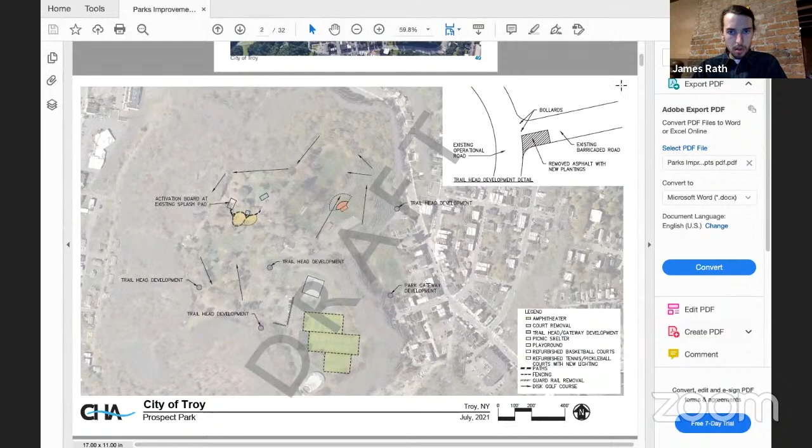So for Prospect Park, obviously one of our larger parks, you can see the arrows here point out our disc golf course, which is fairly new. The yellow down here is the tennis courts. You all can't see my cursor, correct? Yeah, we can see your cursor moving around. Oh great, and the pool down here on the bottom, just to orient ourselves.

So for Prospect, what we really wanted to focus on was the playground equipment. We identified a need for an amphitheater or a small event space. We wanted to address the vehicle traffic and how vehicles have been going onto the lawns and damaging the park space in the past. And with that, we wanted to make sure the circulation worked, not only for people who are walking or driving in, but also our maintenance vehicles, so that those folks can get around the park easily.

And then we talked a little bit about the needs of the tennis courts and other sports facilities like that. So you can see the legend on the bottom right that points out a bit more of where things are. And up here on the top right, this is a standard detail of how we would address some of those vehicle routes.

So we would remove some of the excess asphalt. That could be repurposed for anything as simple as just lawn, or you could plant a tree there or do something else with that space. And then we would have some bollards that would likely collapse down so that maintenance vehicles could get by.

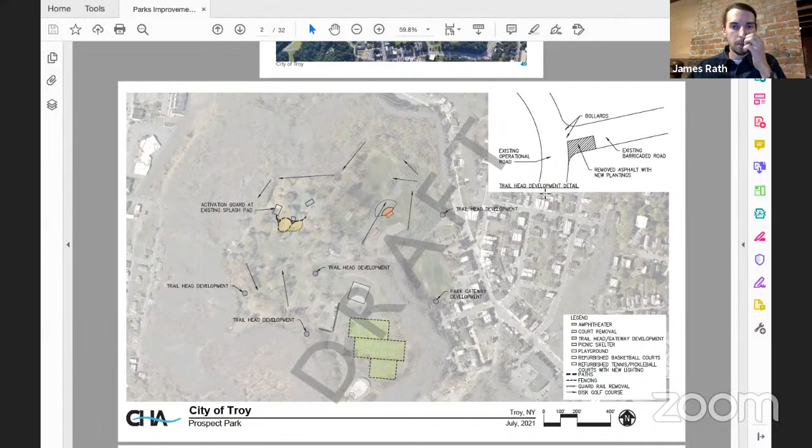So the little purple dots you see are places where we would have this sort of trailhead treatment. The bollards would be sprinkled around about every 6 feet or so, so that you wouldn't be able to drive in there. And the playground area right here would stay in the same location, but we've changed that layout a bit. This orange circle is the amphitheater.

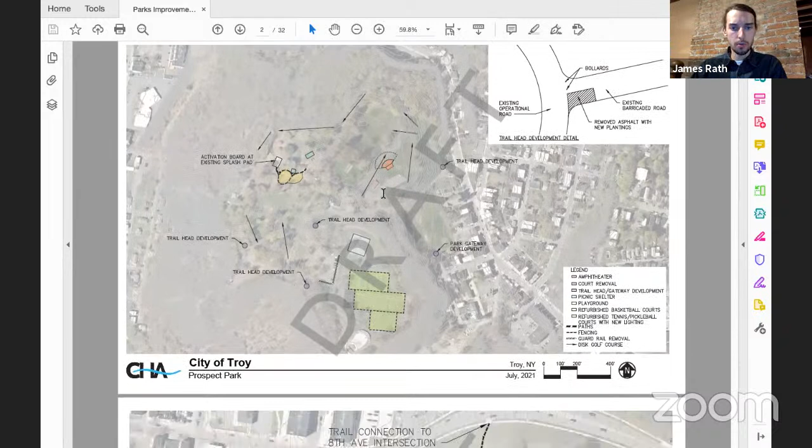Sorry for jumping around a little bit there. I'm just going to keep moving through here. The other main thing we wanted to address with Prospect Park was a new access point closer to downtown.

We know that most of our downtown is the most densely populated area, and we don't really have a true pastoral or open space where people can play or go for a run. We have Riverfront Park, which is very different, and some smaller areas like Sage and Barker Park. But for folks to get into Prospect Park now, they have to walk all the way up around on Congress and Ferry and go around. It's quite a distance, and the grade is challenging.

So we wanted to reutilize some of the old roads that were there back in the day and create a walking path. This would spit you out right over just east of 8th. There's also this existing trail now, which is a little overgrown. Some folks are afraid to go back there. We've had people who have lived in the woods or camped out there.

So the more we encourage positive, active uses, with people going there more often, the more we can discourage people from using these spaces in improper ways. And that goes throughout the park system, not just this park at Prospect.

So we've highlighted the trail on the western side here that would connect down to Haverman's, and goes out over here on Ferry. That would really just be cleaning that up, making it look more official, doing some trailhead signs, stuff like that. And then the trail on the right of your screen that meanders through the woods would need some minor grading, maybe addressing some flooding areas, so you'd have to build some raised walkways, and then just gravel throughout most of it.

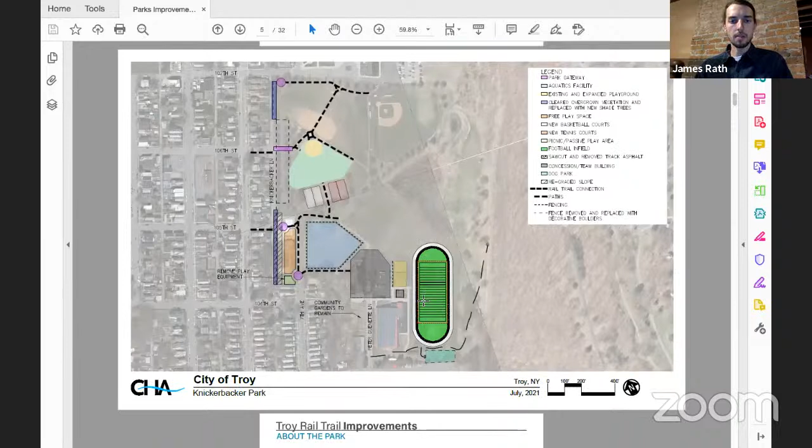Down here on the bottom we have the existing track. One of the main things with Knickerbocker Park was we wanted to create more places for people to play organized sports. We heard a lot from the community, especially up in Lansingburgh, that they needed a place to play youth sports like Pop Warner football, basketball, and things like that. They didn't really have a concrete home, and have kind of been bounced around these different leagues. The city understands the value these leagues bring to our youth.

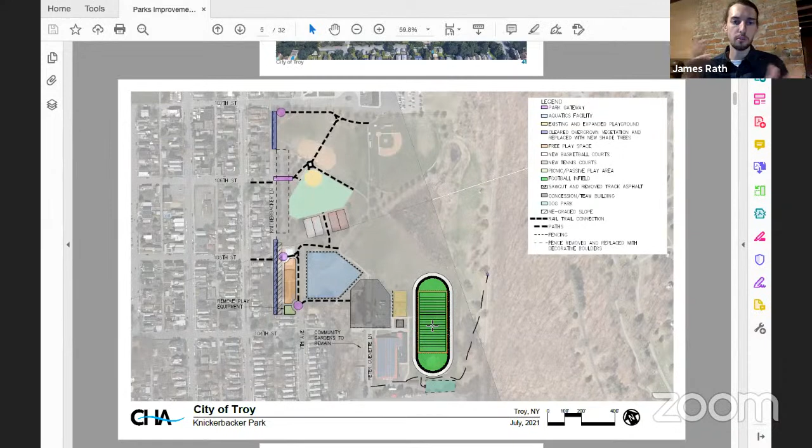Instead of squeezing them into smaller spaces where that use ends up consuming an entire small park, we decided to double down on the sports complex idea that already exists in the Knick. We found that within the existing track you can almost fit a football field. We also found that the existing track is wider than any official track really needs to be.

Oh no, what's just happened to my Adobe? Bear with me one second. My Adobe just quit on me. Sorry folks, let's see if I can just open it again. Oh, all right, that was weird, it didn't quit.

We found that the track is actually wider than any official track needs to be, wider than a high school track would need to be. We're not actually using it for standard track meets or anything like that. So what we highlighted as an opportunity to fit that field in is we would trim out some of the inner edge of the track, allowing us to fit in a full-size football field and give the Pop Warner Football League a home. The field could also be used for lacrosse, soccer, or other things like that.

In this yellow square, if you look at the legend, you'll see a new playground. That playground, from what I understand, has actually already been installed. This black polygon here is a new expanded parking area. We understand that bringing folks in from other communities to play organized sports, along with the anticipated installation of a new pool, means we might have higher traffic in the park, so we'd like to accommodate that with a new parking area that would circulate people a little better.

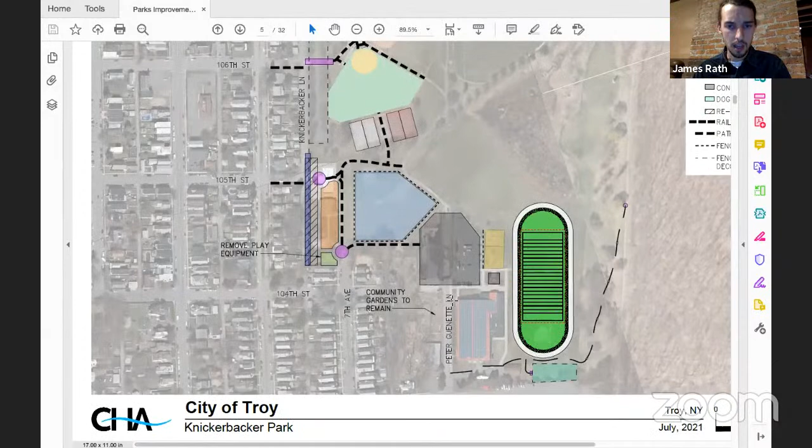So if you're driving to the park, if you're staying for a while and need to drive there, you would take 103rd and go up into the lot as you would today. The access would be maintained on 103rd down below, just off the map, and you'd go up as normal.

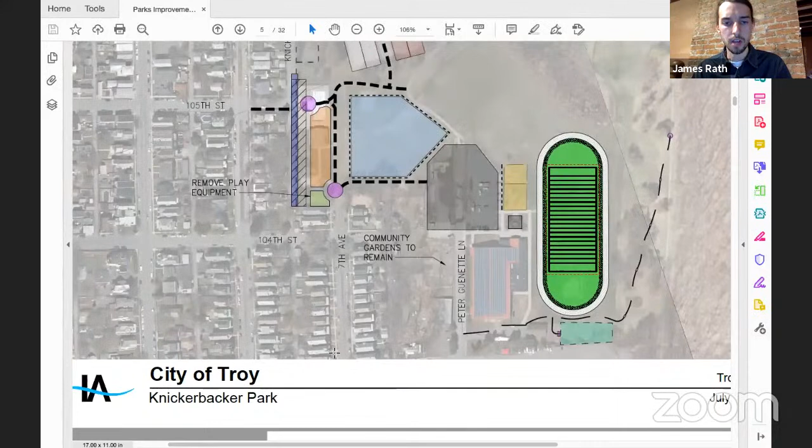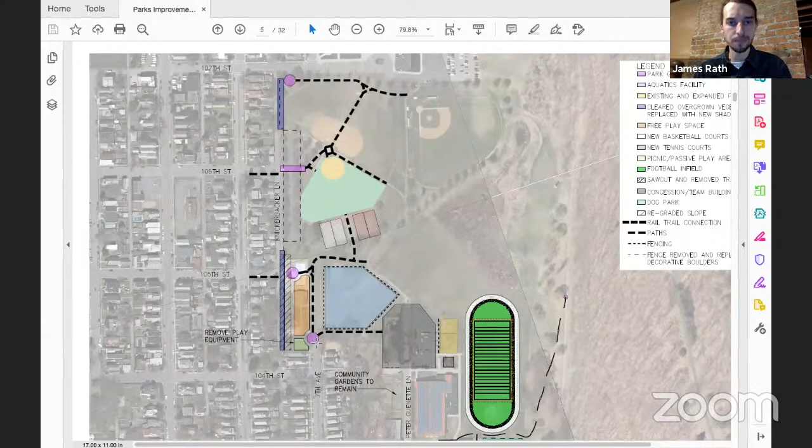But we did want to create these pedestrian connections that you'll see in purple. So you'd be able to walk in from 7th Ave, where it dead ends. There would be new, smaller scale fencing - likely 4-foot black chain link fencing, much more welcoming than the 10 or 12 foot or 16 foot or whatever is there now at 7th Ave, which is very oppressive or deterring, and make it feel like it is actually a part of the community.

We want to do similar things at 105th and 106th and at 107th. Right now at 107th, you have to walk through the school's property to get to this section here. We want to make it feel, again, like it's more part of the community and get people in and out of the park so that they can use it and enjoy it.

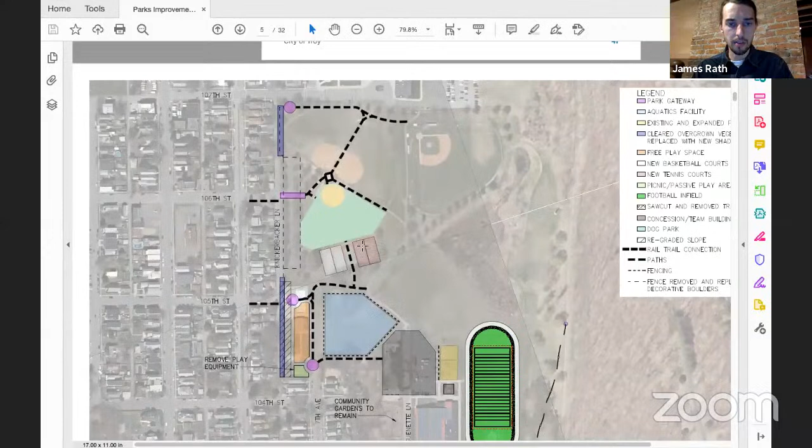We did highlight the existing tennis courts here that are in a little bit of disrepair. We would like to make 2 of them basketball courts and 2 of them tennis courts, because one of the basketball courts would be displaced from the pool's location as well. Okay, that's a lot for the Knick, but I do think I covered all of it, so I'm going to move on.

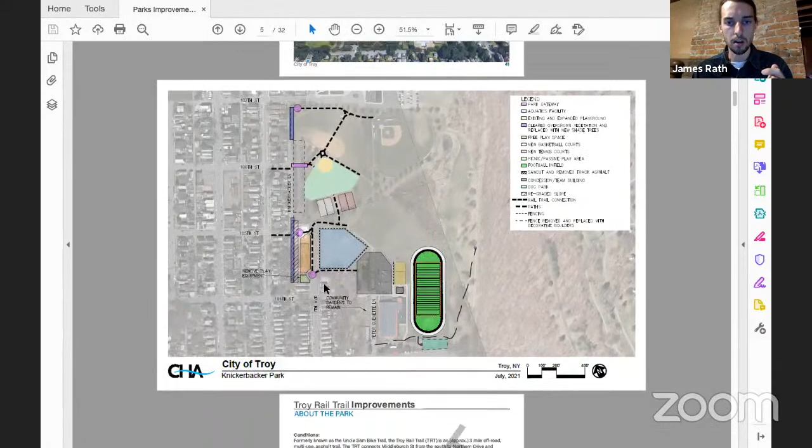And then right next door, I already mentioned some of the ideas around the Troy Rail Trail. You can see 2 photos here, just to again kind of be thinking of what that space is and how it functions.

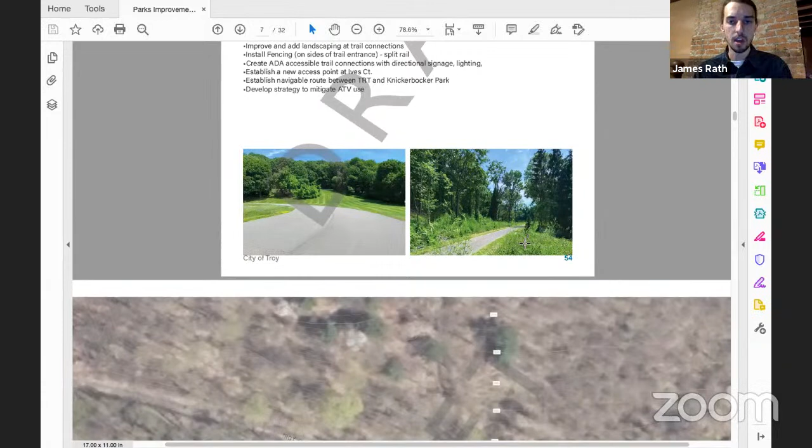Again, we're calling the Troy Rail Trail what was called the Uncle Sam Bike Trail. We do plan on renaming it the Troy Rail Trail to pay homage to its history as a railroad - I think it was the Boston and Delaware Railroad off the top of my head - but it is very loosely associated with Uncle Sam. Really the only thing I've been able to dig up is that his grave is nearby.

So we also have another trail called the Uncle Sam Downtown, which is a history walk that folks do. And we have had calls into the planning department with people confused by having 2 trails named Uncle Sam.

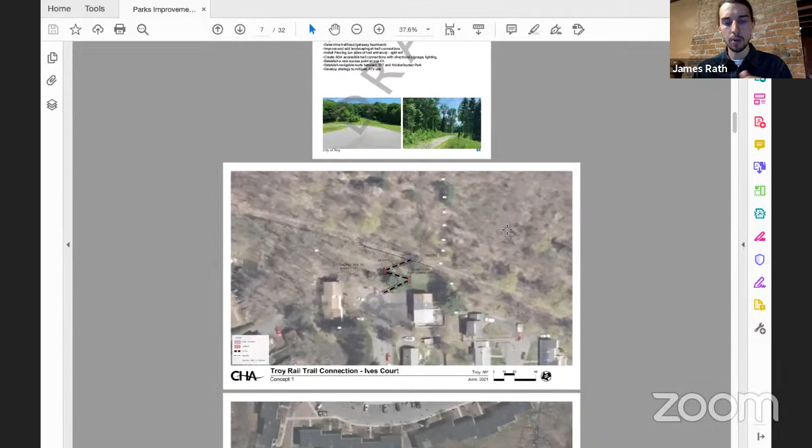So the idea is to change this to the Troy Rail Trail, so you'll see it labeled as such here. I only have 3 different access points on here. We'd like to add a couple concepts together so it looks the same at each entrance, including Ingalls, Gurley, Cemetery, and Northern at least.

Here you can see a new connection at Ives Court. We've been talking to the landowner here whose property has an awkward shape - two landowners on either side of the cul-de-sac have land that touches at the end of the street, which is very abnormal for Troy, usually that's continued right of way. They've had issues with folks going onto their property to access the trail, and they don't own much of the property along the trail over here. So we've been talking about a land swap or lot line adjustment, which seems mutually beneficial, and they've been on board so far - we're working on that as an opportunity.

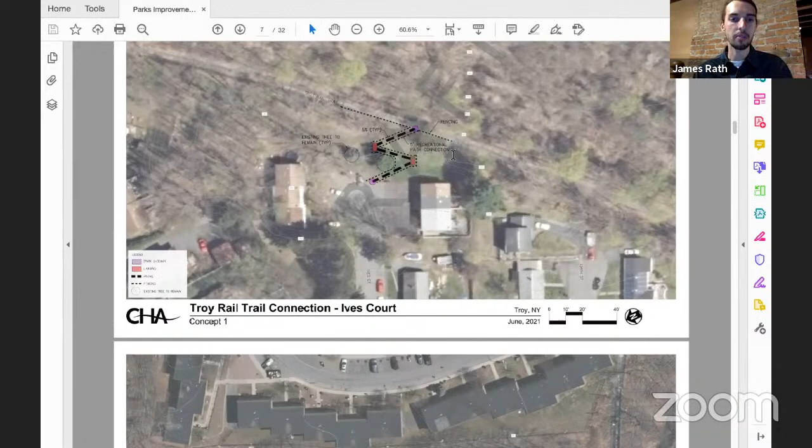So what you're looking at here is a switchback entrance at Ives Court. This would bring a legal, appropriate, inviting entrance to a whole new section of Lansingburgh. Right now, if you live in this community, you either have to trespass across someone's property, or walk all the way around on Northern Drive, where there's no sidewalk, no bike lane, no real safe way to get up there. So the trail loses a whole audience.

I'll show the next one as well, since they're quite similar. Here's Winnie Ave with Garden Court on the left and Glen Ave on the right. Over on Glen Ave, we're doing the same thing as on Ives Court - these are ADA compliant switchbacks. You go into one section and go back and forth to tackle that grade, making it much more accessible. Somebody in a wheelchair can use this facility - it's wide enough and the grade is appropriate.

The light dotted line, the smaller dotted line, is fencing as well. We'd like to include fencing all along this section to deter ATV use. A savvy dirt bike rider will be able to get through anything that somebody in a wheelchair or somebody pushing a stroller will be able to get through, so unfortunately we can't completely block them off, but this is meant to deter them from shooting through these spaces quickly, while also making it warm and inviting to other folks.

On the left over at Garden Court, since we have our ADA entrance on Glen, on Garden we're just proposing a maintenance entrance. There would be either bollards that you could knock down and put back up, or a utility gate, and we'd narrow it down with some striping to make it feel a little tighter. There would be a pedestrian opening there so you could walk through if that's more convenient for you at Garden, but it won't necessarily be ADA compliant.

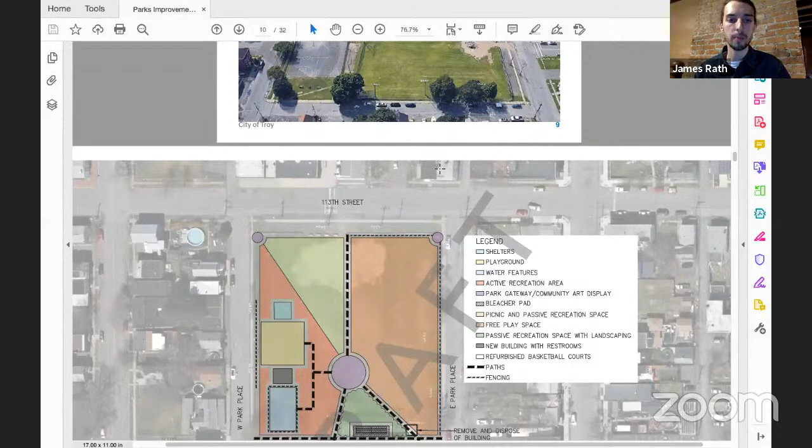We have two concepts for 112th Street Park. I know there will be different reasons folks might like certain concepts, and maybe things we missed in both. At the end it'd be great to get some feedback and hear which ones speak to folks more. They are fairly similar, so I'll briefly show concept one, and then go through concept two in a little more detail.

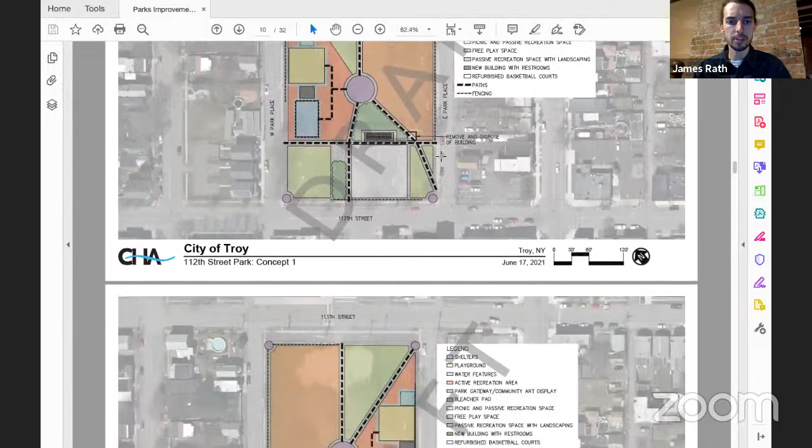Okay, so what you're seeing here, the existing basketball courts here on the south side. Here's 112th Street on the bottom and 113th Street on top. You can see the sidewalk that goes around the Boys and Girls Club.

Just to orient folks, what we're showing with the dotted lines are new pathways that would go through the park. Right now there's the existing old softball or baseball field, which isn't really in use anymore. Jim and I got to meet here and he told me a little bit about the space and how it functions, with stories about breaking windows with his home run hits.

We know that there has been some conflict with the baseball use and the neighbors there, so we know that baseball isn't necessarily the most feasible use here. We're kind of trying to encourage those uses over at the Knick.

So what we've created is a little bit more of a common space. The orange space on the left is just open free play, so kids can bring a soccer ball or football and play on their own. The green space would look very similar, but would likely function more in a pastoral or contemplative way. It would be a space you'd want to have a picnic, maybe do some grills there, stuff like that.

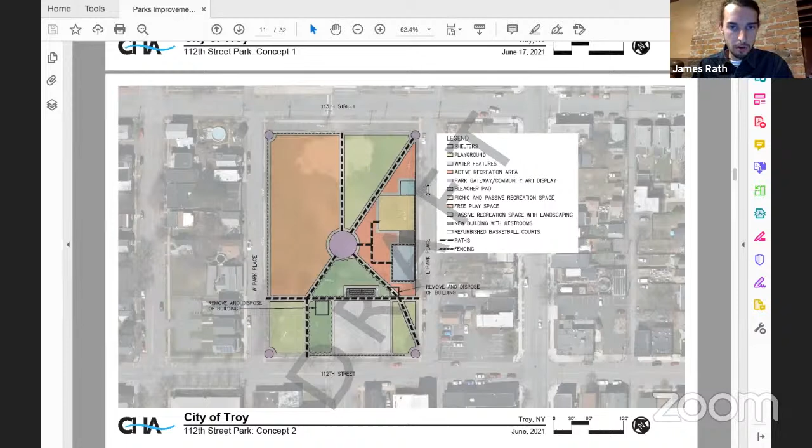This zone on the right along East Park Place is a bit more busy. We've highlighted the space for a splash pad, with a new building with restrooms required for the splash pad. We've got the yellow space as a playground, and the blue space is just a little pavilion.

We knew from speaking with the Boys and Girls Club that they wanted the playground closer to them, which is right now in this bottom left square. They have to walk a little bit further and they're not as comfortable doing that.

And it's really close to the basketball courts, where there's often people getting into an intense game of basketball, and it's not really the best place for a 3-year-old to be learning how to use the jungle gym at the same time. So we've separated those a little bit.

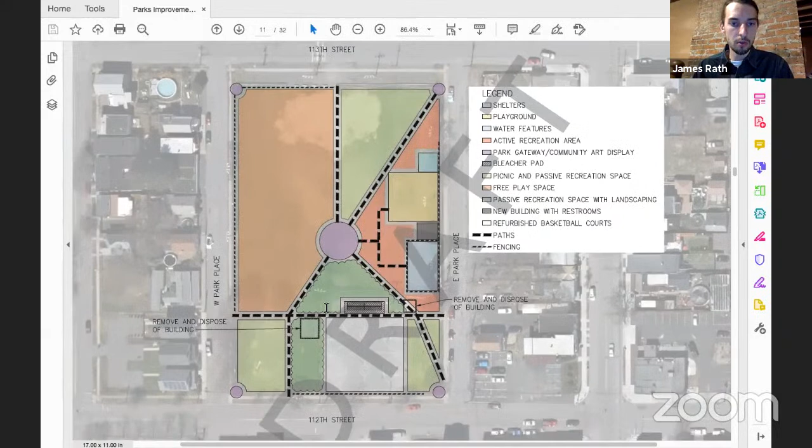We've also added some seating by the basketball court, so when they're having bigger games where parents want to come out, they have a place to sit and watch.

We've added this landscaping area to kind of buffer those spaces. These are small scale plants, maybe 2 or 3 feet tall, low maintenance, but you would still be able to see across the park. It would just not be a place that you'd necessarily want to walk right directly through.

The bottom right area, we know there have been some issues with folks loitering there, maybe bringing alcohol into the park, things like that. We want to clear that space up a little bit. There's some kind of beat up pine trees there right now, so we want to clear those out and create a warm, welcoming entranceway so you can walk through the space.

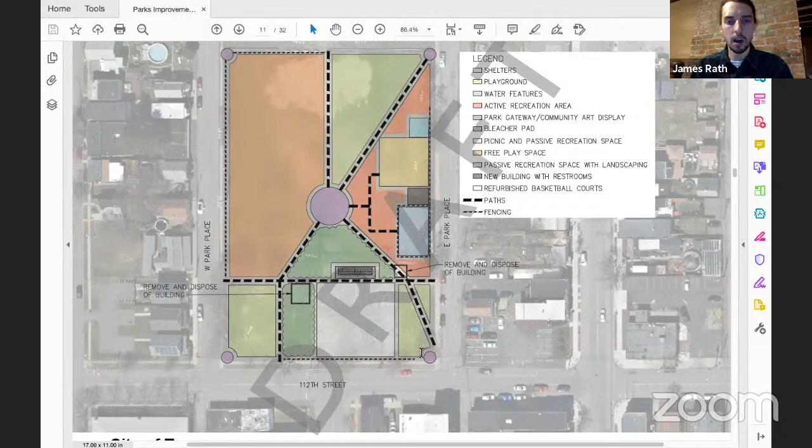One thing that I really like about these concepts is that it creates multiple uses for the park. So right now, if you live in the area and you want to go for a run, walk your dog, or take your kids out in the stroller, you probably aren't going to 112th Street Park. There's really nothing there for you, and no way to get through it.

This totally changes that. It creates a real destination for folks that want to spend a lot of time, but it also is just a route for people who are passing through. So if you want to take your dog on that walk, now you have a great new route to cut through. We have routes that go different ways.

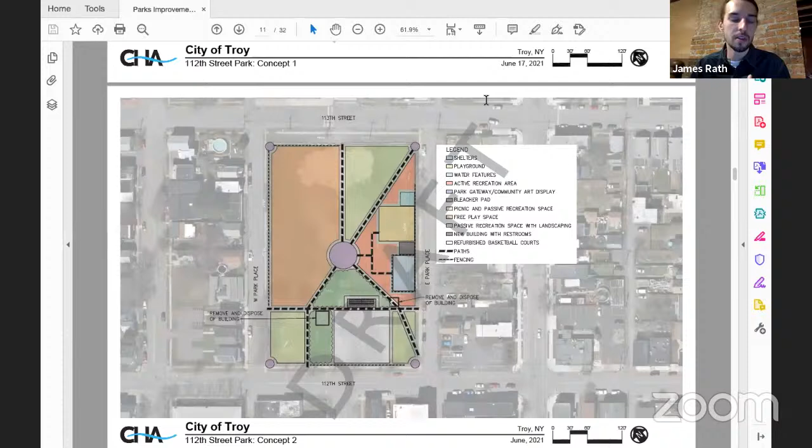I like the route that goes northeast because Snowman Ice Cream is right here, and we know a lot of folks are going there, so it plays well with that sort of thing. People who buy something there now have a new place to go sit and hang out.

Okay, if Bonnie's still on the call, I think, well, hopefully she'll be happy.

If you have a car, you can put your dog in the back and drive to a park in Colonie or Albany. We weren't necessarily filling a big void there. We wanted a space that people could walk to really easily. We know from hearing from folks like Bonnie that downtown there are tons of dogs and people can't really get to a place to let them off leash safely.

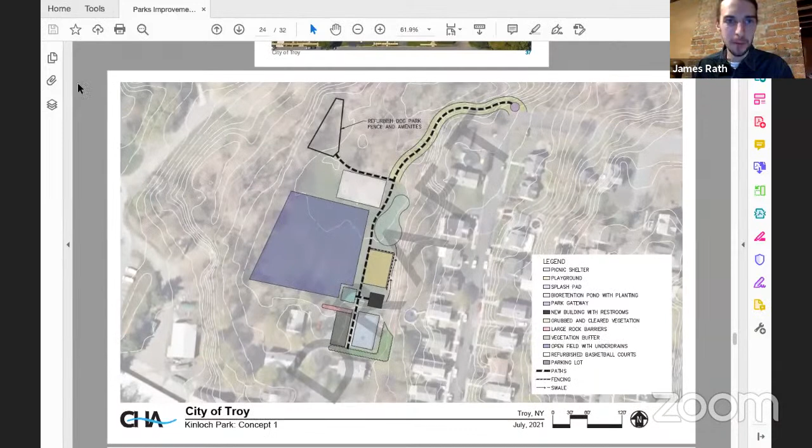Kinloch Park, up on the east side. I think the name of the street is Parmenter - I was calling it Parameter for a little bit, but I think it's Parmenter. Kinloch is actually over here, and Emma Willard is right over here on the top left. Again, we have 2 concepts, so showing concept 1 now, I'm going to go through concept 2.

There is, or was, a dog park there now - there's a fenced in area. The fence is a little damaged, and we've been there a handful of times and I haven't seen or heard of anybody using that dog park space, probably because of that state and the location. We could easily remove this fencing, but we've heard from some folks in the community that they would prefer for it to be refurbished and fixed up. So we've shown that here on the concept plan, but again, we don't necessarily need to put another dog park here if that's what the community didn't want.

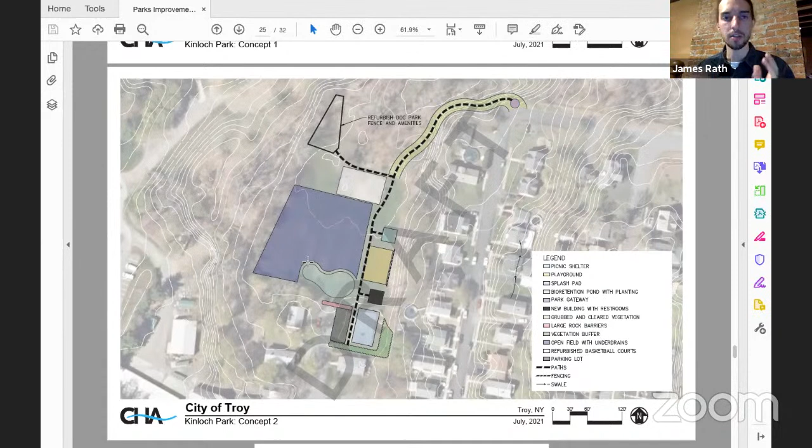This blue area is just a field, and right now we know that field area floods fairly consistently - even throughout the summer months, this field has drainage issues. So that's one thing we've really tried to focus on with our plan. We've talked about drainage strategies, and we've also talked about adding a bioretention area, shown here as this circular polygon, which would be a simple way to contribute to solving that issue.

We also want to create a real park entrance and gateway, not only at the bottom on Parmenter, but also up by Kinloch, where we have city-owned land. Similarly to some of the spaces in our other parks, we've heard of misuse in the backwoods area. And we also know that if you live over here in this area, it's harder to get into the park - you might not go as often. There's no way to do a loop or walk a route where you'd be bringing your kids or your dog through this park.

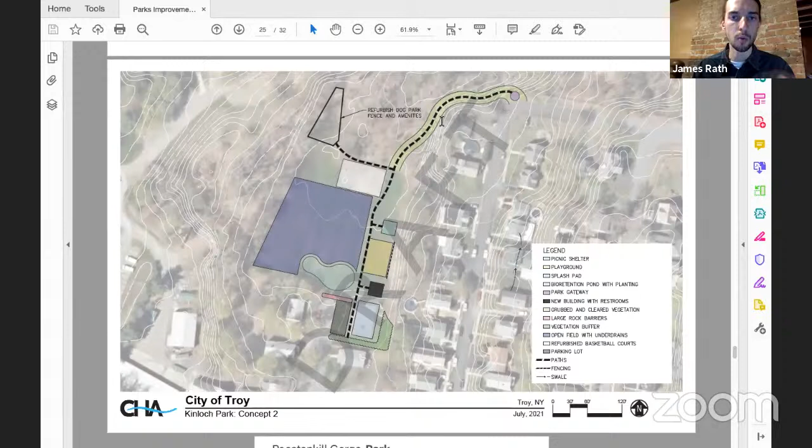So we wanted to add a wooded nature trail, another access point to the park in this corner. And then at the bottom, we really want to make it feel welcoming, like a gateway. Right now it's like a big piece of guardrail - we want to remove that. We want to add more decorative elements like nice looking bollards or maybe some boulders so that people still can't drive into the space, but we would put in a maintenance gate for our maintenance team to get in.

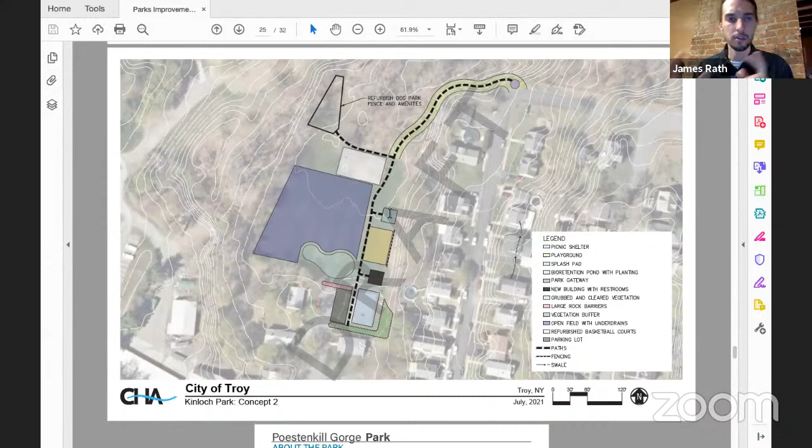And then the black lines show the walkways. On the bottom right, we have a future splash pad location. We have the associated restroom, and then the yellow, which would be the new location for the playground. The small square here is a pavilion. So this is kind of a similar layout to 112th with that splash pad playground combination.

Poestenkill Gorge Park—I think most of us are familiar with this space right along Linden, just south of Congress. You're looking at the zoomed out version, which shows three phases. Up front, we did not highlight any amenities we're adding into Poestenkill Gorge Park within our $2 million of that budget.

So we're now stepping from the priority projects we've outlined to some of the other elements we've been able to design through this park's money. From the north, there's a trail that would go through the parcel being worked on and acquired through the ampersand deal. On the south, this is along Linden.

Right now along Linden, it's obviously a really steep road. We have a lot of fast moving traffic and really no safe way for folks to get up and down. There's a guardrail there, and a lot of brush on the west side of it. So we want to clear out that brush and add in a paved walkway so folks have a safe way to get up and down from the park to the lower community where most people live.

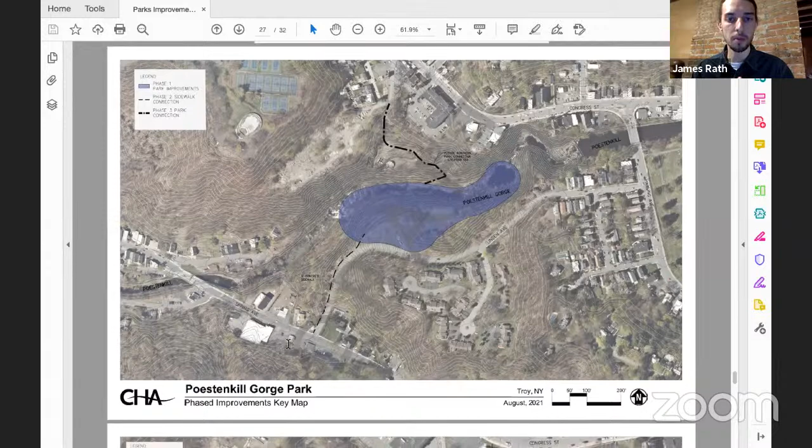Zooming in on the park itself, we have these fields with a pretty significant slope. Those fields aren't actively being used for things like sports or kicking a soccer ball like flatter areas in our other parks are, and they're really a maintenance burden on our team—they're sent there to mow these steep slopes, and there are additional erosion concerns. So what we've proposed is just letting that become a pollinator meadow, planting some wildflowers, and having it be a more welcoming space for people going to the gorge or the park.

Speaking of going to the gorge, we know people often get to the existing overlook, and that space is in disarray and beat up, and they can barely get a glimpse of the waterfall. They say, wow, that looks cool, I want to go down there—and look, here's a path that a whole bunch of other people have clearly been using. So we want to stop that overall in its tracks. It's a pretty dangerous issue—people are going down to the gorge and getting hurt, which is very troubling and concerning.

What we found working with CHA is that you can actually add a new overlook further down where you can see the waterfall—you get a really good look of it. It's not that much more work on an engineering side or a build side. Then we can create a new platform that's properly blocked off and harder for folks to get around.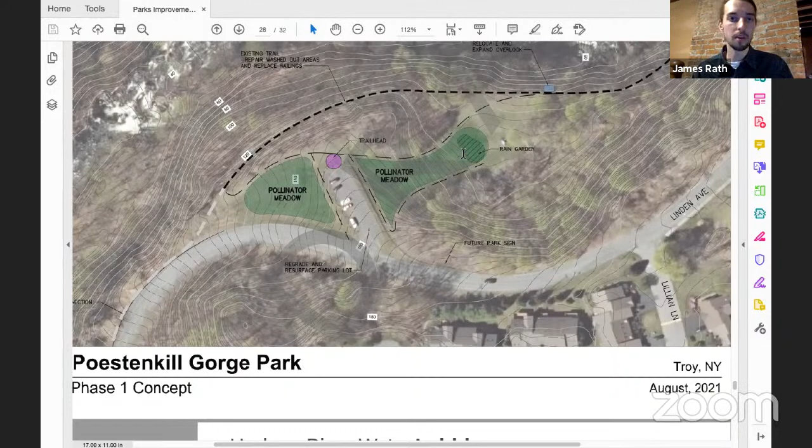Right now, a lot of the water that comes down on Linden and the rain we get in the parking lot area goes right down onto the trail heading north, and it washes out that trail. So we have a lot of erosion issues and additional maintenance burden with this design. We'd like to push it further northeast along this pollinator meadow area down to the rain garden, which would help preserve those trails, keep them safe, and reduce the maintenance needed there.

The next, and I think this is the last concept, is the Hudson River water lobbies. This was identified throughout the comprehensive plan and probably a little bit earlier than that as well. A lot of the dead end roads, or roads that have vacant open space on the other ends of them along our rivers, like the Poesten Kill and the Hudson up in Lansingburgh, have publicly owned sections on the opposite end of the road.

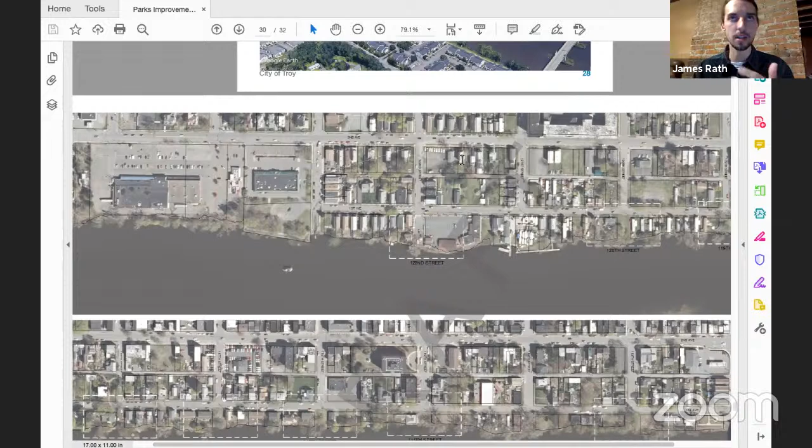It's kind of hard to explain, but if you look at the map, a good example is this one at 122nd... actually, that's not a good example. Let's go to 120th. It extends, and this area between these two homes is actually city owned, it's public right of way. In some cases, adjacent landowners have been creeping onto that land, but it is indeed city owned.

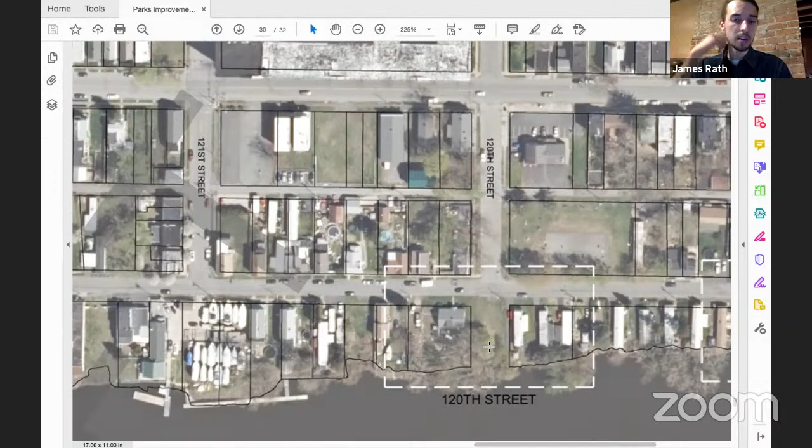We've identified this opportunity to create water lobbies, as they've been called. These spaces have also been referred to as 'foot-ofs' in the past—again, just city-owned land on the opposite end of a street where it dead ends. We'd like to create these spaces where people can get out and enjoy the waterfront. They wouldn't really function as big parks; they'd be fairly small in size.

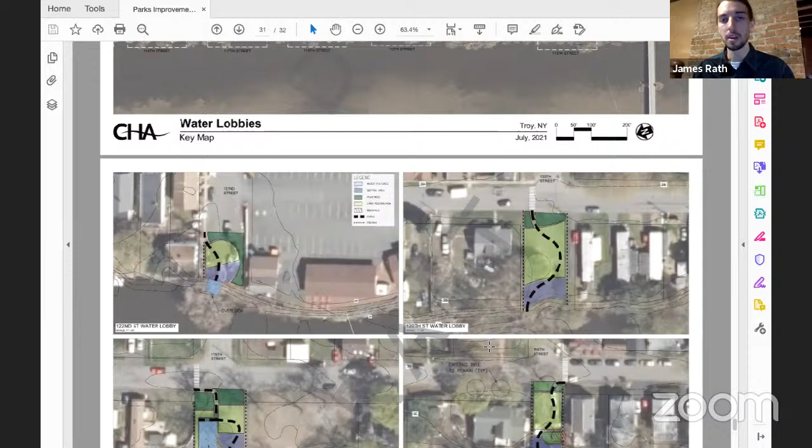You'd go and there'd be a great place to look out over the water, maybe go fishing or read a book, take some photos—simple things like that. Real neighborhood amenities for the folks who live there. These likely wouldn't be big destination points like the Poestenkill Gorge Park. They'd really be little nooks where people could spend time with local friends and family.

These concepts are fairly simple—they're really plug and play. You can copy and paste one into different areas, but we did design each and every one of them. They follow a similar pattern where there'd be a little bit of landscaping, a little bit of plantings. Here, I'll zoom in on this one so you folks can see it.

So the green area is plantings. The lighter green is just a lawn restoration, so it'd be a simple lawn area where you could lay out a blanket or something like that. The black dotted line, again, is a pathway. And then there would be maybe a picnic table or something closer to the water—this one's calling for a water feature, so maybe a little bit of an elevated area where you can get out and see the Hudson River a little more closely.

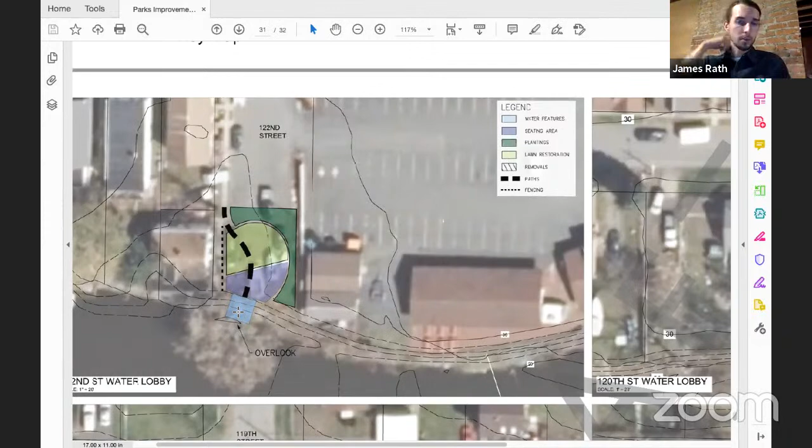So yeah, we have each of these designed, but they do follow a similar pattern. This one, for example, has a little bit of a loop you could do. We also called out—this one's got an accessible fishing pier, and this one's got an informal kayak launch. We talked to some neighbors who said, 'We've been putting our boat in the water here for 10 years,' and we said, okay, if you've been doing that for 10 years, we'll make it so you can continue to do so. It's not going to be an encouraged space, but it would be possible.

So that's the last of the concepts. Again, I'm happy to share these with you all after the call. But I would like to go into the budget.

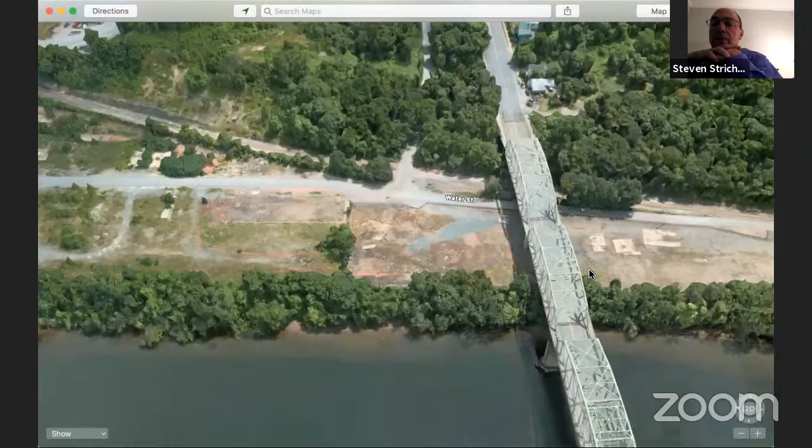Stop there for a second. We don't own that, that's the line, right? That's a Chevron property, and to the left of that is King Fuels property. At the lower left, to the left of those silos, National Grid has their gas regulator station, and there's a pipe that goes across the river. So the LDC is looking at trying to sell that property to do a better industrial development there, although some of that will likely include relocation of the salt pile.

Michael Barrett basically expressed some information about the historical value of that site. How do we stand with that? Is that something that... where do we stand with that in your eyes?

Well, again, I think what you need to do is document the structure that's there. It's no different really than when Schenectady tore down the Alco plant to make the casino. You go in, you document the artifacts, take photos, provide interpretation for whatever gets facilitated there or at another location. Saving that building, the only portion that's really salvageable is what you're looking at, the T there. You can see the roof as it heads to the right where it changes.

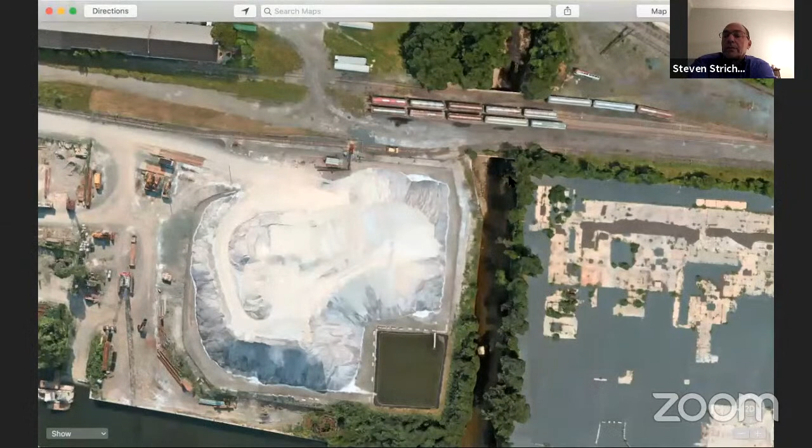Does it go from Adams? It's River Street, basically, yeah, it goes from Adams south. It's basically a River Street continuation. So it includes a bridge extension here, is that correct? There's a bridge, yeah, there's a bridge extension across the Poesten Kill, and it's a portion across the Scolite property. Right, so the rails remain for now.

What if it ends here for now? What does that do to the funding and to its impact? If it ends where? At Madison. What if portion 2 goes from Adams to Madison? Well, why would you do that? Then you have a discontinuous industrial access road that doesn't even benefit anybody in South Troy.

We would lose our funding, I'm sure. We already broke this into 2 phases to be able to get the first part built and show that we were making some progress, so that the second phase wasn't stripped, or the additional funding wasn't stripped from us, because everything north of Monroe Street was the difficult portion to do.

The acquisition there between the salt pile and the Bruno manufacturing building. I can't imagine them letting us split it out into a third, especially with no plan. Why would you just want to get this done and make it this road that will benefit all future development, including that site, the Scolite site, and everything north of there.

Yeah, I mean, I guess if it's not an industrial road anymore... well, it is still an industrial road though. There's trucks down there, there's sites down there north of the jail we don't control, there's industrial properties south in King Fuels. There's going to be industry down there. So it will have industrial usage.